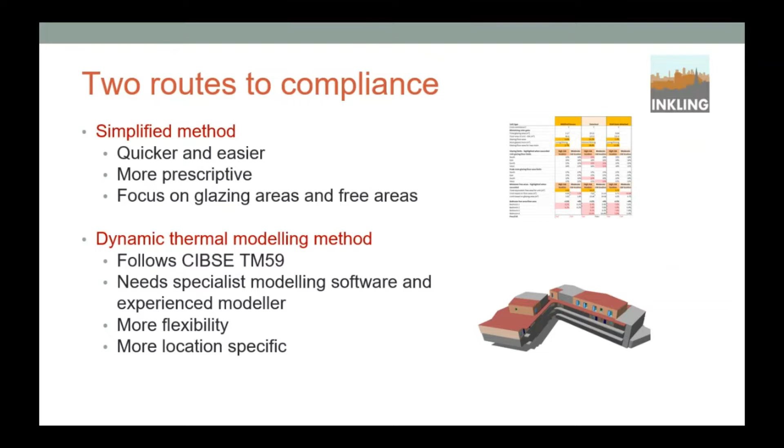The alternative is the dynamic thermal modelling route, which follows CIBSE TM59, using dynamic modelling tools like TAS or IES, usually Design Builder. You do need specialist modelling software and an experienced modeller to progress it, if you want to do it yourself. It does offer a lot more flexibility - shading measures, different locations in the country, different design options can all be included, shading from surrounding buildings. So it can give you a better result, but there's more time involved.

So just to cover some of the additional requirements that apply whichever route you take - there is at least one acoustician in the audience, so correct me when I go wrong.

There are requirements on noise at night. It's specifically at night in ADO. There may well be other planning conditions that set limits on relying on open windows during the day, but this is only at night, so for bedrooms and what will disturb sleep.

These decibel limits have been set. I'm not going to talk about how you go around measuring them, but the point, as I understand it, is that these levels are likely to occur in quite a massive number of sites. Apex Acoustics have estimated that around 30% of existing homes would exceed these limits, so it's quite a big number of sites. It's not like a few niche, very noisy environments - it's anywhere near a busy road or a train line or anything where there is noise.

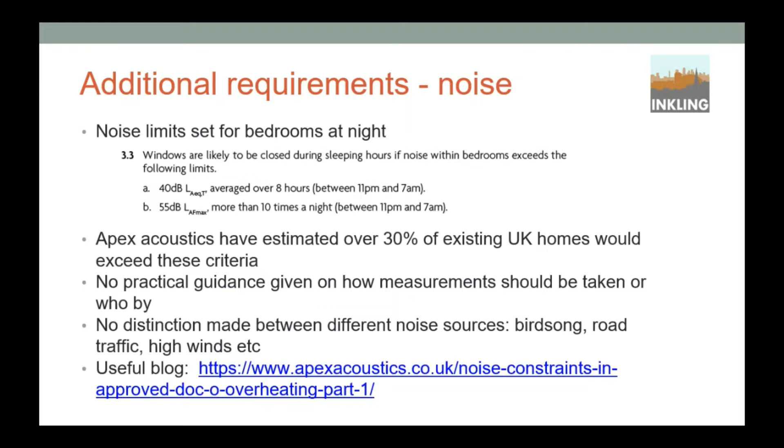Again, we're waiting - I know the acousticians are working quite hard to produce some guidance on how you go about measuring those and fill in some of the gaps that the ADO leaves, but that will follow. It's not my area, so I'm not going to cover it in too much detail, but be aware that these limits exist and there are implications.

So when those limits are exceeded, you need to think about how you are going to mitigate overheating at night. It may be possible, if you're only just exceeding those noise levels, to still use openable windows but with smaller openings. At nighttime overheating is less, so you may get away with a reduced amount of free area. Provided you open windows wide during the day and crack them smaller open at night, that might be enough to reduce the noise coming into the targets.

Alternatively, it may be that some kind of acoustically attenuated vent or other passive measures like screening, using balconies, split balustrades - there are a number of measures that may be possible, but they usually have quite a small effect on reducing noise coming in, so they may not be enough if you're on a really noisy site.

So the next step is mechanical ventilation, and what I understand from DLUHC is that it would be acceptable to still model with the windows open during the day, but then use a mechanical solution at night, just for those nighttime hours when you're sleeping, provided that mechanical solution is quiet too. But if there are noise issues during the day as well, with planning setting requirements on not relying upon open windows during the day, you may well be looking at a mechanical cooling solution, because it's really difficult to pass that, particularly in London.

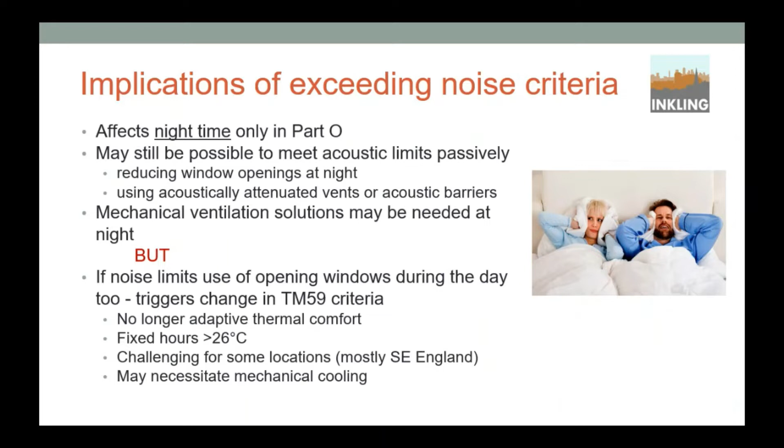So just - sorry, I'm using up too much time on that. Additional requirements - the other one to think about is security.

If you're modelling windows as being open, you need to make sure, particularly on the ground floor, that it's secure when they're open and that burglars aren't going to climb in, or whoever else might climb in. So hopefully we'll possibly see more options such as bars and grills and secure measures to make sure you can leave windows open but still get breeze through. They need to be fixed and lockable.

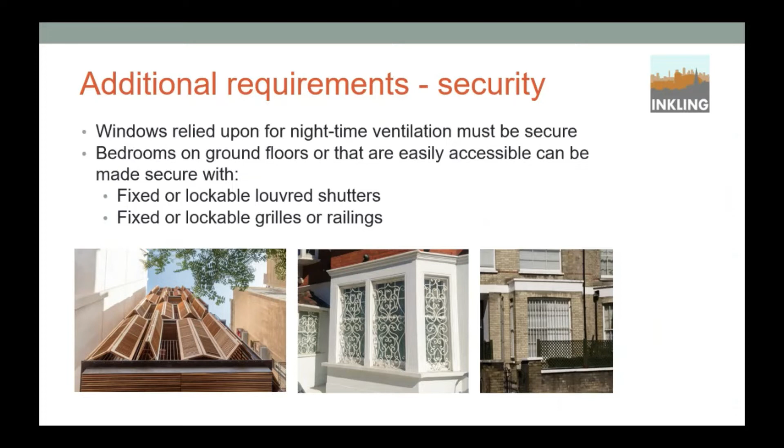Protection from falling is another big one, and again applies whatever route you're following.

There's now a minimum 1100 sill height required, which is quite high when you look at where that is on windows. You can have glazing below that, but the openable panes need to be 1100 sill height, or there needs to be some guarding measures lower down to give you that same effect.

The other thing is reach. So with windows, if you have a wide window, you can't open it or allow the free area used in your calculations to be more than a 650 mil reach from the inside wall, so you can't fall out of the window trying to open or close it. That seems fairly sensible, but it's quite tricky to measure.

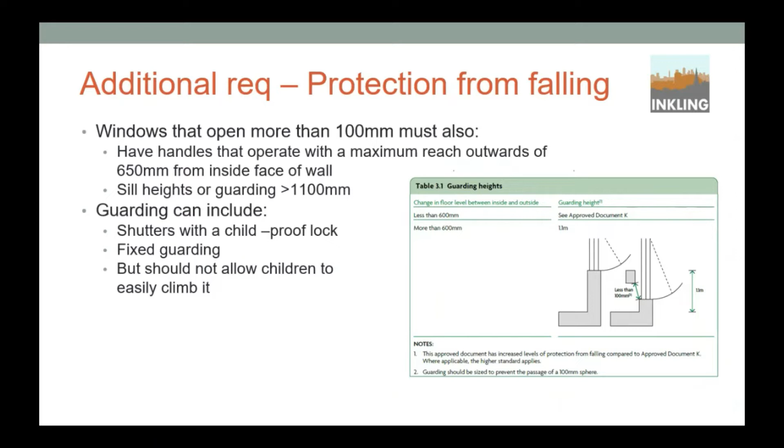So, the simplified method - not as simple as it sounds. You have to test every single unit, and there's a lot of measurements you need to take. The glazing area has to be measured and the free area has to be measured - not the same thing, because not all panes will open, and the framing has to be taken into account as well. You have to go through that process.

There are maximum limits on glazing areas and minimum limits on free areas, set based on where you are in the country. If you're in a high risk location, which they define as London, with bits of Manchester recommended to include, or moderate risk, which is everywhere else in England. Also whether the unit meets the criteria for cross ventilation - windows on opposite facades, so not a corner unit, not an articulated unit - it has to be diametrically opposite facades to qualify as cross ventilated.

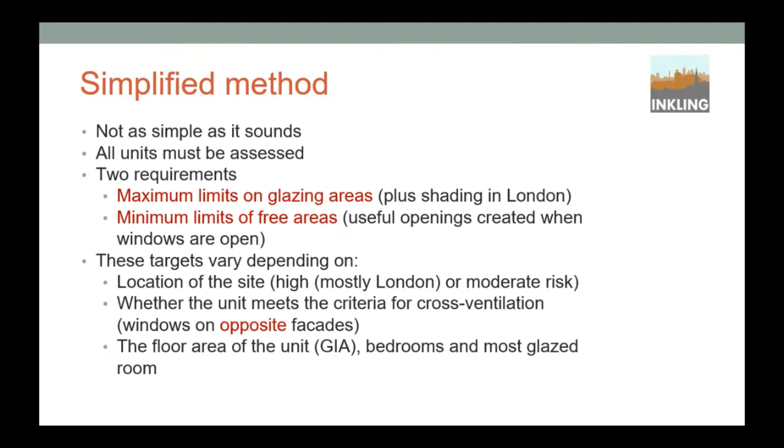The orientation affects the targets given, with west facing having the toughest targets, considered the highest risk. And then the floor area, the floor area of the bedrooms, and the floor area overall - there's a lot of measurements you need to do. So brace yourselves, there are some flowcharts coming to help you navigate all that, but it's more of a challenge than it initially looks.

For anyone who isn't familiar with CIBSE TM59, it includes two criteria: an adaptive thermal comfort test, which applies 24 hours in occupied rooms, and an additional nighttime criteria that is tested only in bedrooms and is a fixed 26-degree threshold - again, aimed at making sure sleep is comfortable.

Those criteria do change if you move to a predominantly mechanically ventilated scenario, so you can't use opening windows for mitigation of overheating. Then fixed criteria kick in, which are much harder to pass in London. An outside weather file doesn't help.

Part O has made some minor changes to how you model the window openings - your modeller will understand all that. But the big difference is that Part O says you cannot use blinds or curtains in the model. That is going to be a problem in London, because it's quite usual to get to the point where that's the last bit that gets you over the pass.

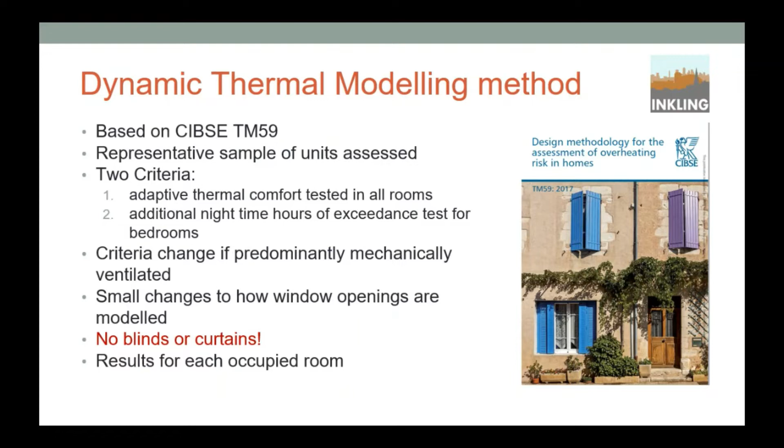So I'm interested to see how people get on with that, and whether that results in more mechanical cooling going in as well. Then you get results for each room and work through to make sure that you pass all of your sample units.

So which method you choose is up to you - there are benefits either way in terms of cost, time and flexibility. I think we'll see more evidence coming out as more people do these assessments about what works where, including some of the ones I'm working on myself for the Future Homes Hub, which should give you some more advice on where your best bet is.

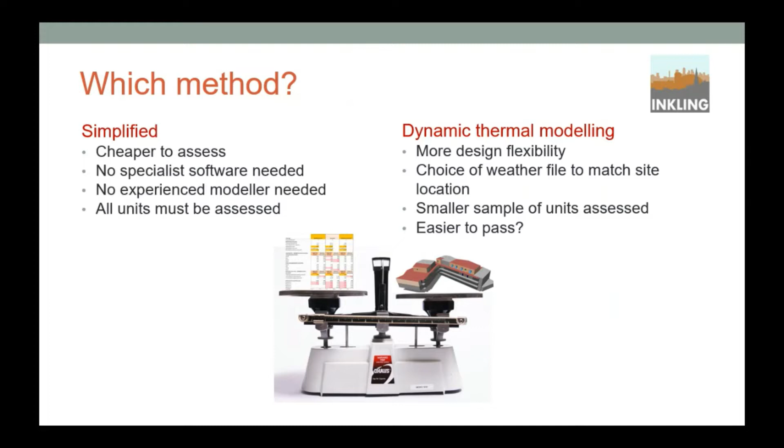But in summary - am I in time? Okay, 15 minutes. In summary, the simplified method is time consuming, not as simple to apply as it first looks. It also looks quite difficult to pass, particularly oddly in lower risk locations.

Our initial research suggests that results from the simplified method and the dynamic modelling method don't always correlate very well, particularly in cooler, windier parts of the country - they will sail through TM59 but flag up quite a lot of problems potentially if they've got those areas using the simplified method.

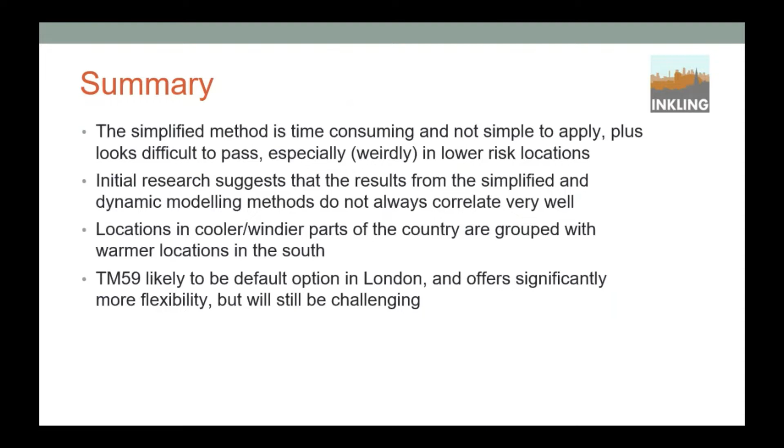Covered quite a lot in a reasonable amount of time, so sorry for the gabbling, but yes, that's me. There's a few resources out there if anyone needs more help, including the guidance for the Future Homes Hub, which will be out by the 16th of June - so we've written that. Brilliant, thank you very much, Susie.

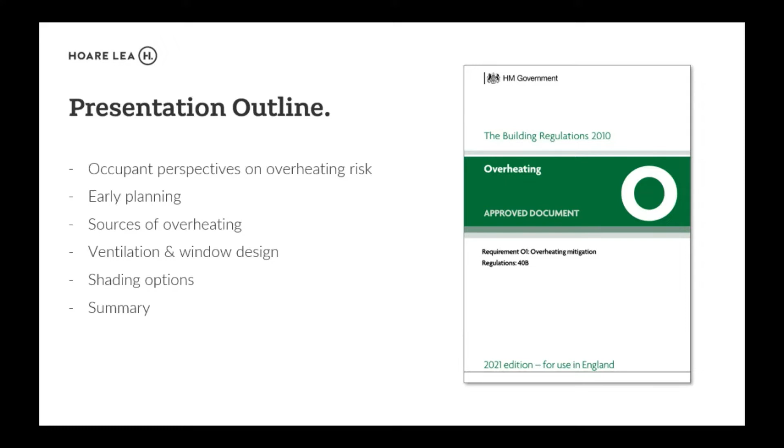So yes, I'm Imogen Christodoulou. I work with the sustainability team in Hoare Lea, and I have a specialism and a passion for really putting occupants at the heart of everything we do, to think about health and well-being and how people will actually use spaces in reality. So I'm going to link to everything Susie said, but really think about designing for occupants. I'll talk about what occupants' perspectives are on overheating, where those sources come from, what we might need to do design-wise, and hopefully challenge some of the ideas.

So what I just wanted to bring up first is that at the heart of everything we do within our sustainability team at Hoare Lea, we think about both human-centric design and also planet-conscious design. We're always trying to find that balance between making the space as best it is for the people that are going to use it, whilst also having as low environmental impact as possible. But where I come from, my opinion is that occupants' health and well-being must always come first, because they're the people that are going to be using those spaces.

I'm sure you're all aware why we're here. Overheating can kill. It causes a significant number of deaths every year, and that's going to increase. We've all seen news stories where we have heat waves with an excess number of deaths, and as designers we want to do all we can to bring that down. The statistic that by 2050 the number of deaths from overheating will be the same as four times road traffic fatalities per year is really shocking. But it's not just mortality rate—overheating has a big impact on health. I'm sure everybody here has experienced horrible sleepless nights where it's just too hot and you don't feel rested at all. So everything we're doing is trying to reduce that.

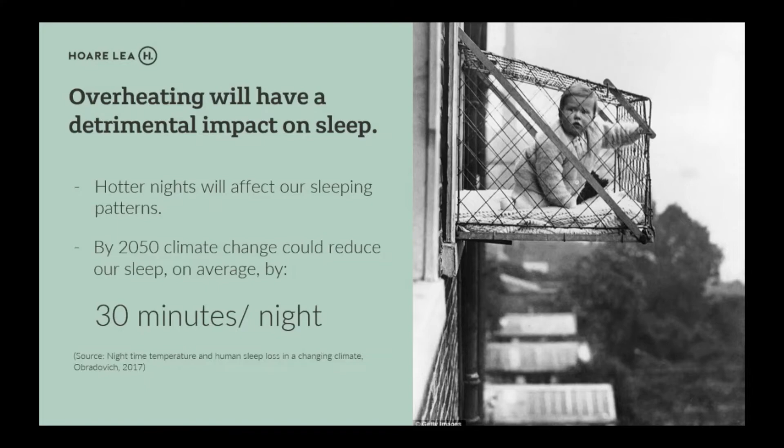But who are we designing for and what do they want? At the heart of what we do, there's a diversity, a range of people that live in these spaces. We're designing homes for people with varying needs and different accessibility issues. We're designing homes that people are now using for workspaces. Traditionally, we would spend most of our week in offices or out in commercial spaces, whereas now we're spending a lot of time at home—working, raising family—and we want to feel safe and secure in the homes we live in. So we have new priorities: that work-life balance, and the increasing use of our homes as offices.

We're expecting more, and we're understanding more about what is detrimental for our health and how buildings impact that. So what are the key challenges we've got at the moment? We're obviously facing rising temperatures. In recent months, we've seen real growth in rising energy prices, which is only going to increase over the next year. And we've also got increased home working, so how we're designing homes is very different to how we would have designed homes a few years ago.

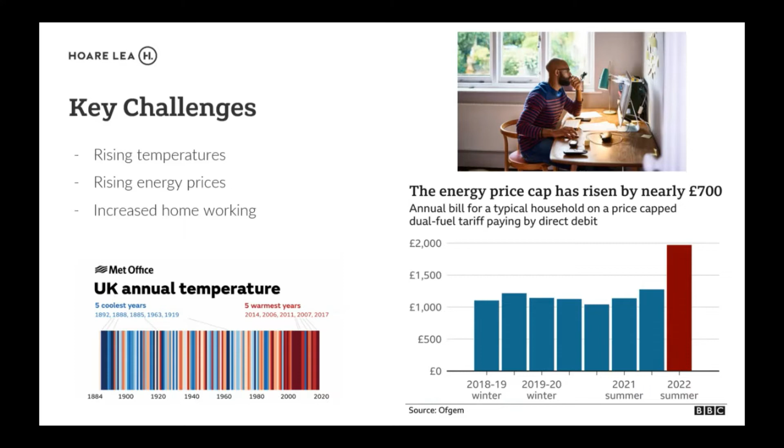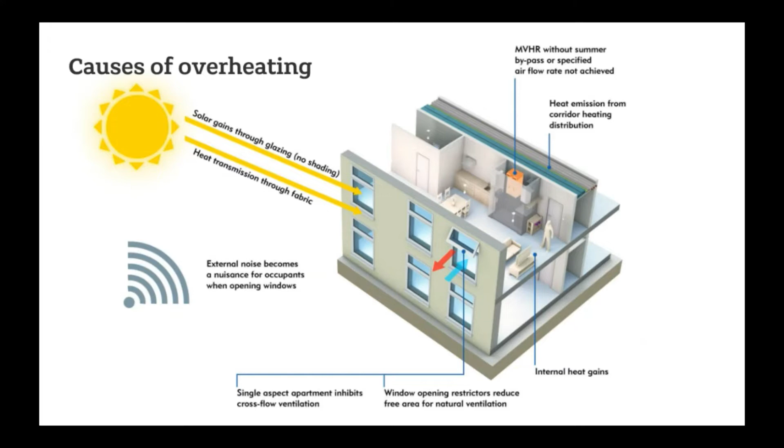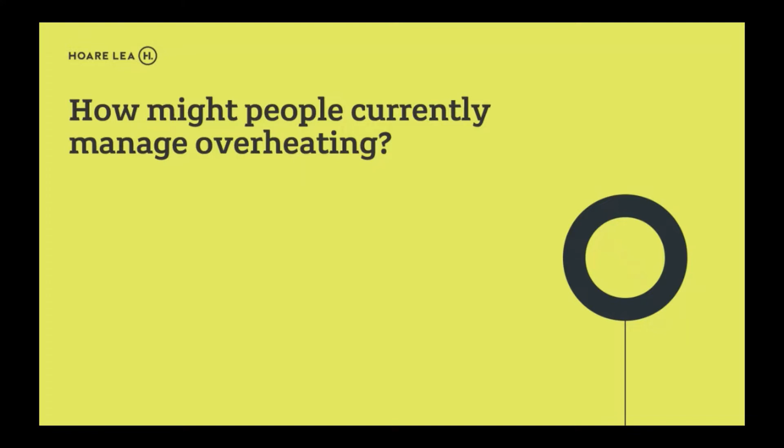In terms of what that means for overheating, there's all sorts of different sources—solar gains, equipment that we put in the space, how people use it. So currently, how do people manage overheating? I think we use regulations and guidance to manage and see how people use it, but how do people that buy those spaces, who don't work within the industries that we do and don't have the knowledge we do, operate to make sure their space doesn't overheat? I know I use a mixture of pulling blinds and curtains, opening windows, using fans. Some people might start putting in air conditioning, and that's what the average person would expect to manage their overheating.

So what can we do to make sure they're managing that space properly? Early planning is key. There's a study we did a few years ago with the UK GBC covering all of the things that impact health and well-being in households. I'm not going to go through each bit to keep it moving quickly, but so many of these elements feed into that Part O.

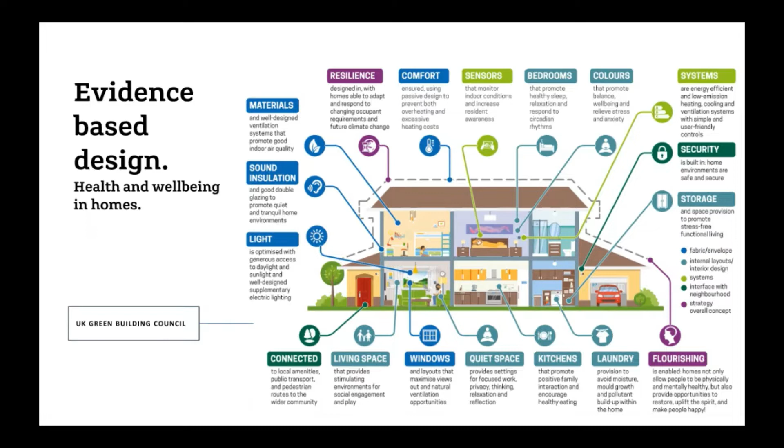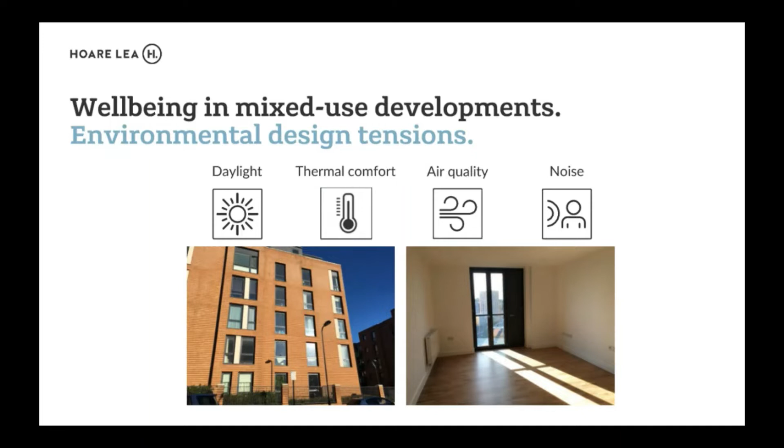Sound, noise, comfort, sensors, bedrooms, windows, screening, quiet space - everything links in basically. So in terms of mixed use developments, as Susie was talking about, we've got this mixed tension in terms of environmental impact. We've got air quality issues, thermal comfort, we want to maximise daylight, minimise noise constraints not just at night but also in the day, as people spend more time there. So we really need to work early on to optimise that facade design.

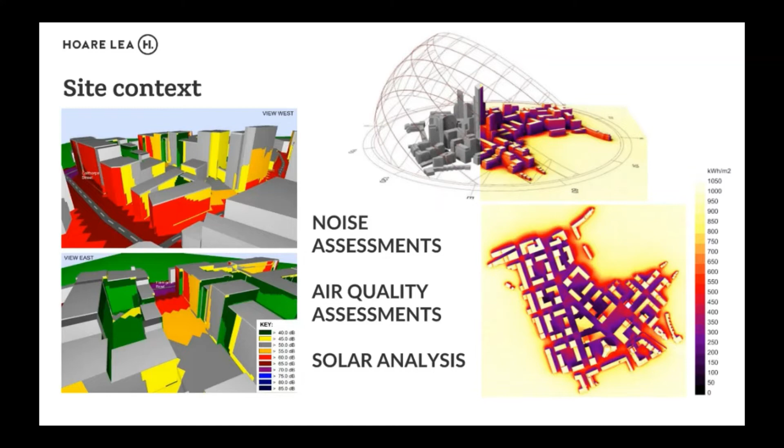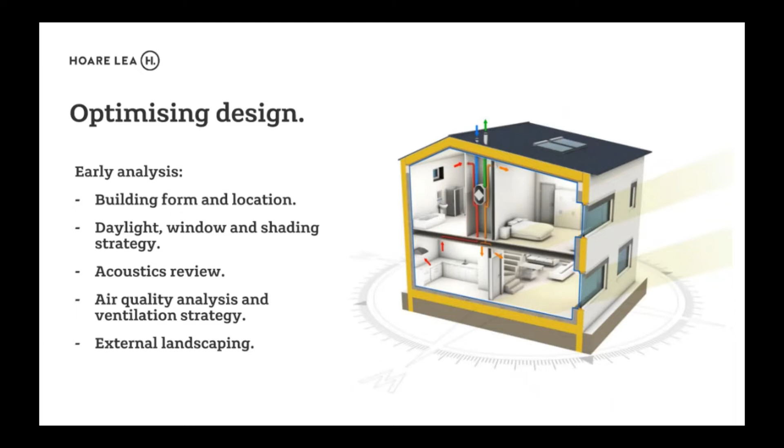We need to combine various different assessments. We need to really be thinking at an early stage - we have those noise assessments, we have air quality assessments, we use things such as solar analysis, so that when we come to designing our spaces we've got all of the information, we can really design a space that maximises everything it needs to - getting the right amount of daylight in whilst not increasing overheating.

And what that looks like, we might see increased, obviously, different types of shading. This is a building just across the road, but we've got those external louvers. Increased greening, which as studies have shown, can bring down temperatures of buildings, as well as obviously making the spaces look nicer.

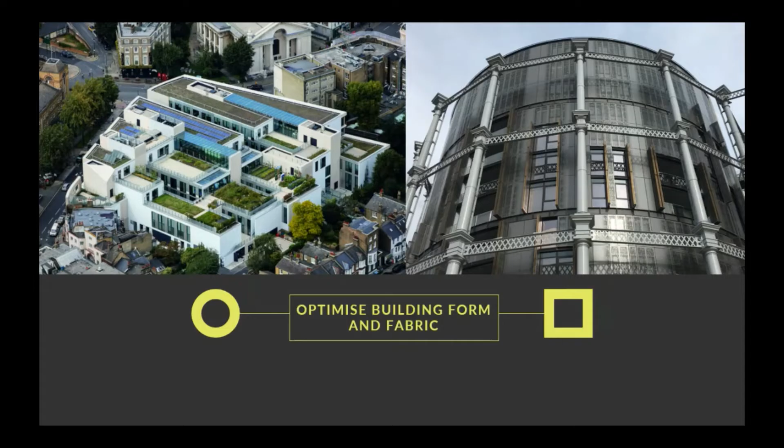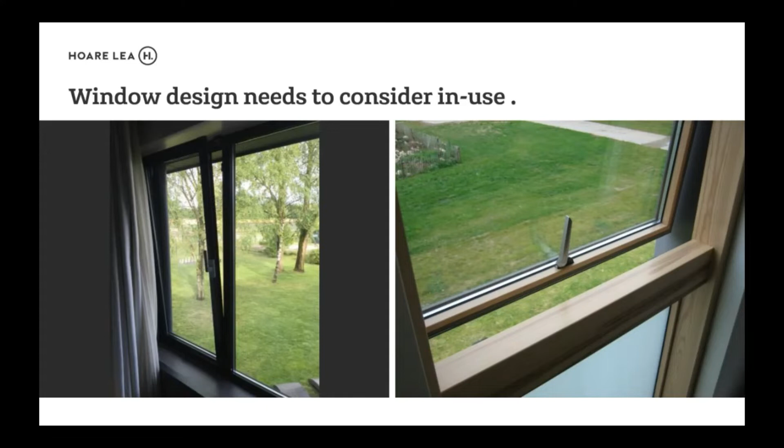Thinking about windows, not just in terms of what the regulations say, but actually how people are going to use those windows and what people need out of that space. So two contrasting pictures - the top one on the left, you might look at and think air gets blocked coming in through that window, but from a safety point of view, that minimises the risk of somebody coming in through the window. Whereas the bottom one, you'll get more airflow in, but obviously it might go against those security requirements.

And then, thinking about challenging how we design spaces and what we expect to see out of houses and homes - external shading is not common in this country, but it is in countries around the world where they have higher temperatures. So working to change that mindset of what we expect to see in houses and how houses might look, by putting that external shading on to comply with regulations and minimise that risk.

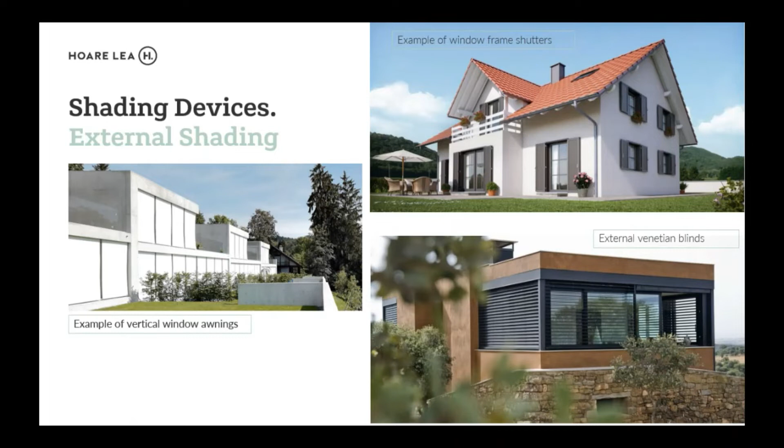And then really thinking about safety and security. We all want to feel safe in our homes, we all want to feel secure. It's one of the things the guidance talks about, and we see a lot of ground floor bedrooms. Now ground floor bedrooms may not be the best thing to have if you're trying to minimise overheating, because you've got to have that security of those windows and external locked louvers or shutters. But that isn't an option for all types of housing - there's accessibility issues where people would have to have ground floor dwellings and ground floor bedrooms. So we need to make sure that when we're designing, we're really thinking about all the people that will use that space.

And then safety in terms of windows - we would start seeing that shift from having windows that open at the bottom to just having high level windows. As I mentioned earlier, thinking about how people use that space, we design and think we shouldn't have windows that open because it's not a way to manage the overheating. But personally, and I'm sure many of you in the audience feel that when it is hot in the house, one of the first things you do, regardless of anything, is open that window.

We design a lot of office buildings thinking about closed facades, but know that regardless of whether that's the best thing for the air quality within the space, people do actually have to open windows. From that psychological benefit - whether it's actually giving a benefit or not, it's that perceived benefit that people really respond to.

So I'm sure everyone in the room, as conscious professionals and high quality CIBSE members, would be considering success in any given project to be the balance of all of the sometimes competing demands, particularly net zero carbon achievements that are demanded of us as designers and delivery teams, together with the important and vital issues of human success of the buildings that we're building.

So the right solution, when we look at projects - my day job at the moment at Dixon is to look at the performance of the buildings we deliver. We're a tier 1 construction contractor delivering mainly for social developments. Our success criteria are energy consumption, carbon emissions associated with that, cost of energy, and comfort and human factors, including acoustics. So those are a pretty decent set of success criteria, and I think the ones we're all trying to intuitively balance across the projects we're delivering.

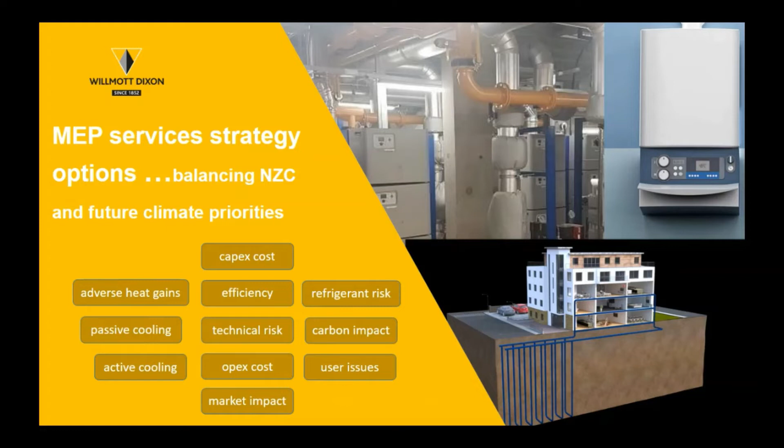So I'll just take you through some of these projects, food for thought really, in terms of examples of what's happening on projects individually. The first one is a completed project, a low-density development we did for Bristol City Council, a mixture of private and social houses. On that particular approach, not particularly challenging in terms of net zero carbon or overheating risk and challenge.

But I think a little bit of a direction of travel towards avoidance of fossil fuel and district heat networks, which were both excluded by the customer's focus on wanting to move towards, as far as we could within cost constraints, a net zero carbon future, with some consideration of future overheating risk. So the services solution chosen for that approach was a shared loop ground source heat pump system from the Kensa manufacturer, very familiar with.

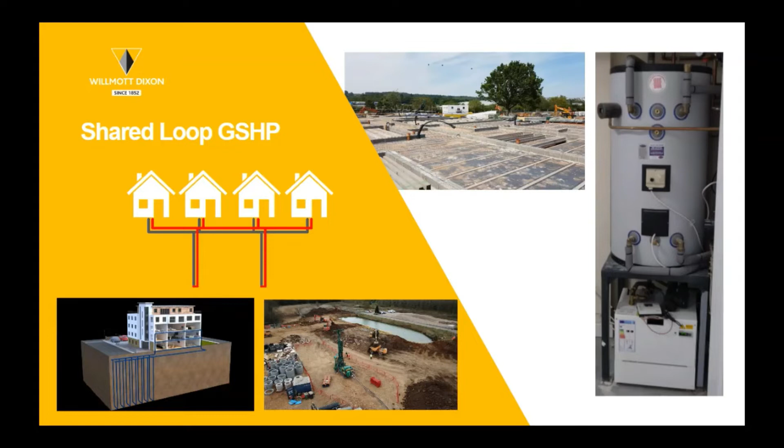So that system, pretty different in MEP terms from our project management team standpoint, integration of a lot of M&E services early on in construction projects, which gives us quite a big challenge. But the important part of this project really was that the customer, as well as all of these outcomes, wanted to focus on how these units performed, and that's essentially what we did.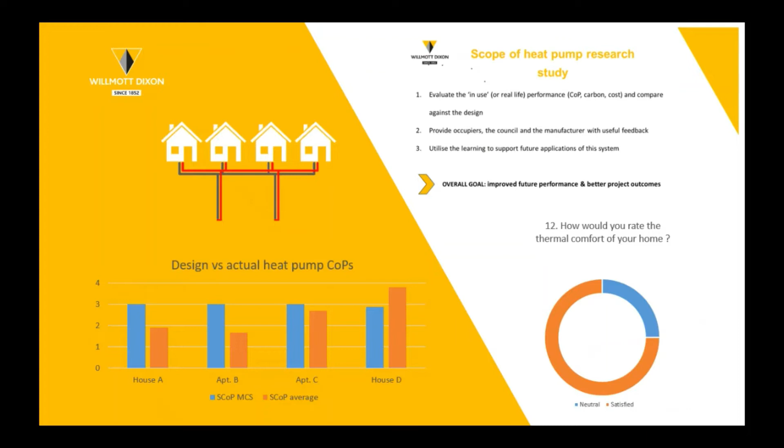Limited amount of information on thermal comfort. That wasn't really the focus of the study, but that's something we will be looking at in future projects, of which this is the first.

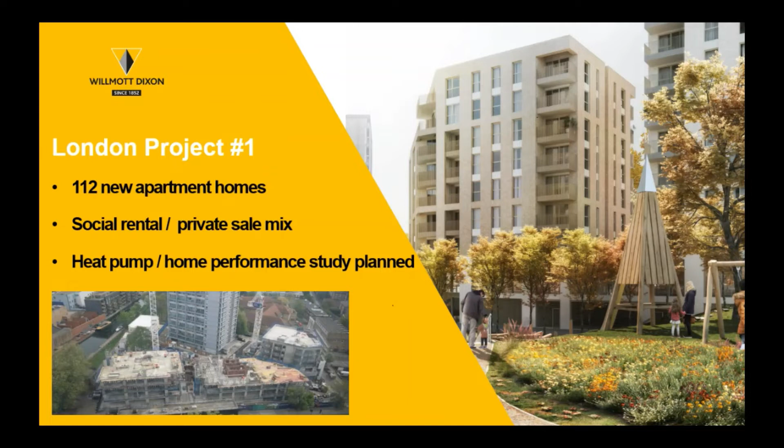This is currently in construction for the local authority customer in London. Very challenging urban site, very close to major highways, multi-storey residential, with probably all of the challenges that Part O would throw at us. The solution for that project is using Daikin ambient loop heat pump system. Other manufacturers are available - we have no links to any, completely agnostic in that regard. So I'd be interested to hear questions and experiences on others.

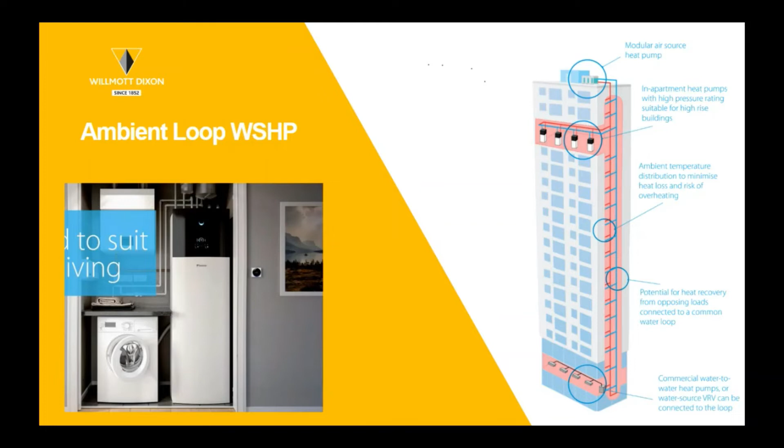Those systems offer the possibility of active cooling and active heating and hot water generation. And that project did evolve quite substantially in moving from a gas and electricity-based system towards non-fossil fuel, which is an interesting direction of travel. That was the customer's political decision to do that at some substantial cost to them.

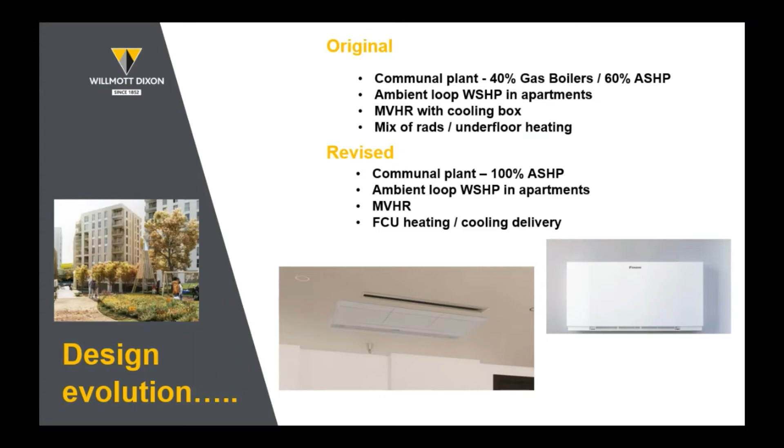So that's an interesting direction of travel, moving towards this kind of heat pump system being more normal than in the past. And challenges, of course - whilst it's clever and combines heating and cooling, and that's great from a COP standpoint, it does result in a system that is really pretty complicated. A lot of kit on the roof, there's a lot of kit in apartments, and it's not very proven technology.

And that's exactly the reason that we're doing some performance studies ourselves with our own resources, to look at how well these systems really work out in actual terms, like we did with that system.

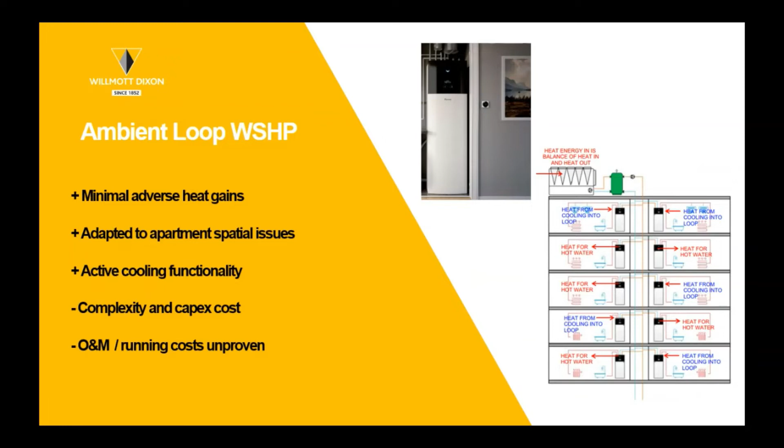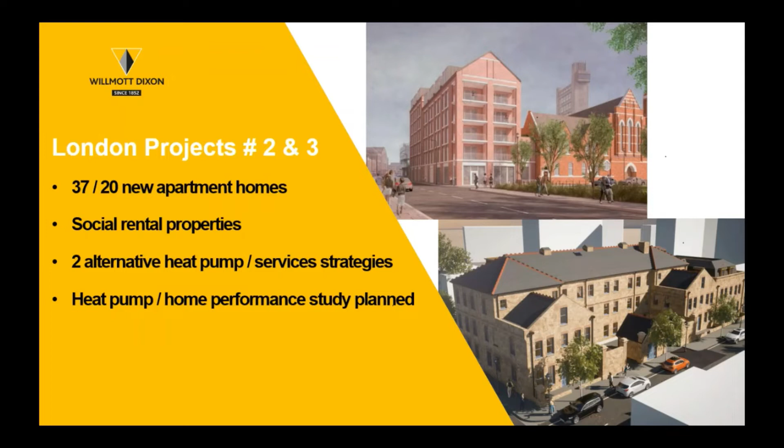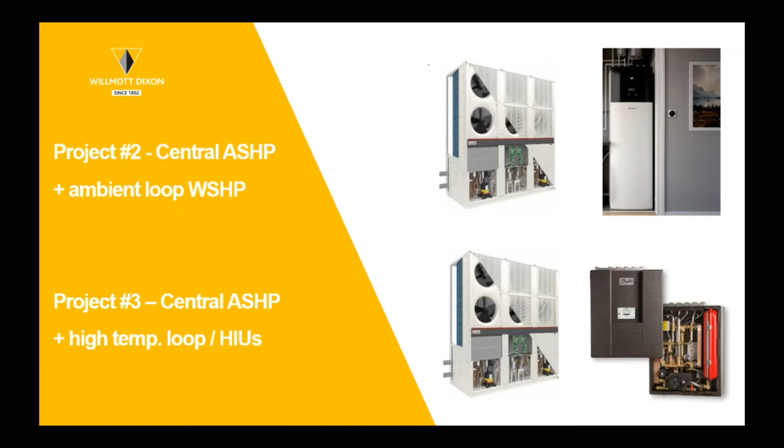I think the interesting challenge from our standpoint between those two systems is the degree to which adverse heat gains from a high temperature or medium temperature heat network supplying HIUs is going to contribute to overheating matters. Everyone in the room's heard horror stories of that in the past, and that remains an issue with any kind of heat pump driven temperature system. So that's something we're trying to focus on quite a lot.

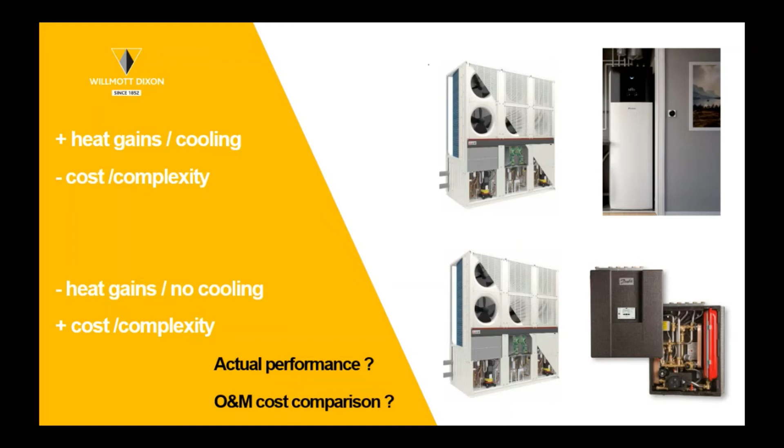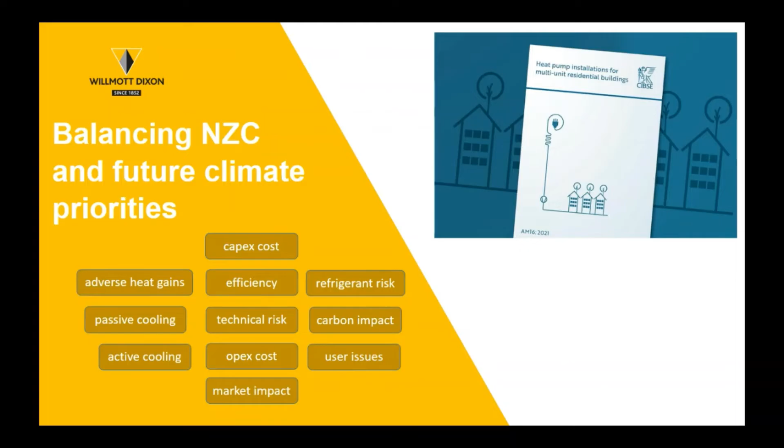I've rattled through that in the right amount of time. So, perfect. Thank you very much.